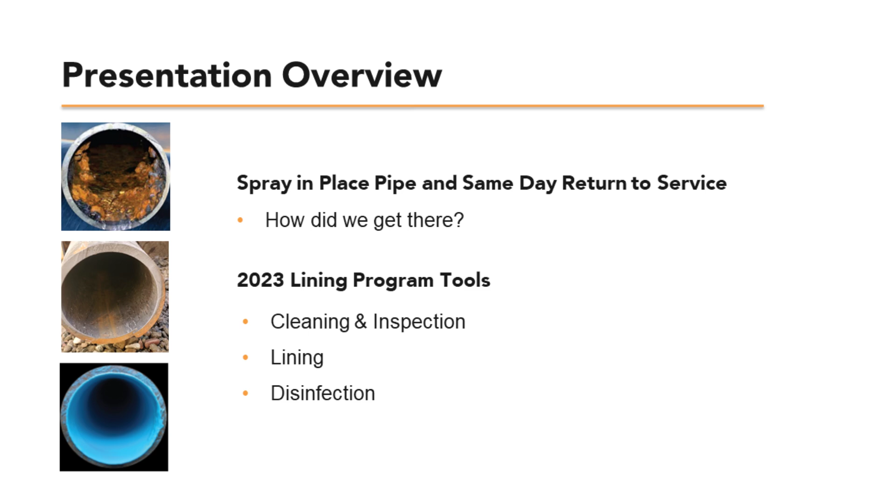I was asked to share a little bit about our journey implementing a spray-in-place pipe program, and we'll talk a bit more about what led us to choose spray-in-place pipe as an alternative for infrastructure rehabilitation, and share with you some of the tools we use in our cleaning, lining, and disinfection process that enabled us to provide same-day return to service.

This is probably a familiar story for a lot of water professionals, but as municipal and economic population growth rates have varied over history, so has construction of municipal infrastructure. In Sault Ste. Marie, a construction boom beginning with the end of World War II and lasting some 25 years accounts for the single biggest age cohort of water mains in the city. Predominantly made of cast iron, corrosion processes are the principal cause of deterioration of these pipes.

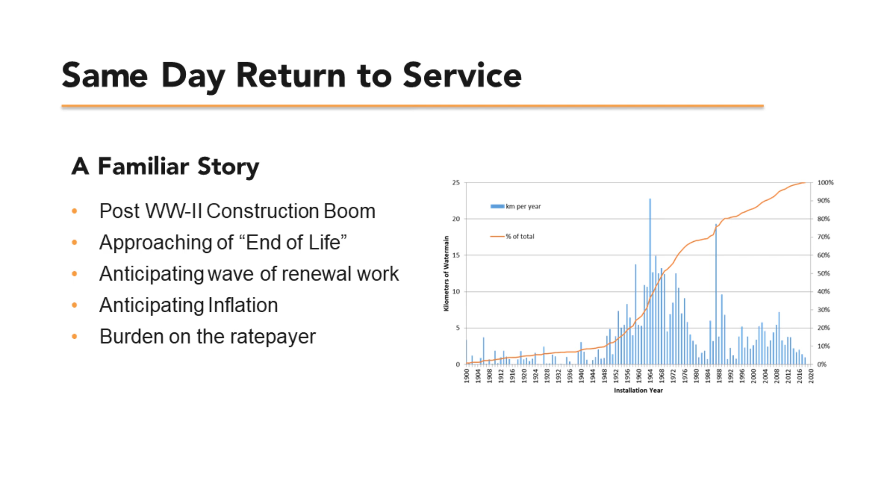The PUC reasonably anticipated a wave of infrastructure renewal at rates considerably higher than conventional replacement programs provided. Inflation of renewal costs was also anticipated. The PUC had a need to address this potential burden to its ratepayers.

Now, we're not alone. In 2018, the Utah State University report on water mains in the US and Canada described corrosion as a major cause of main breaks, described the average age of failure of water mains as being 50 years. The study also found that over 40% of water mains were of iron or asbestos cement, both of them subject to deterioration over time.

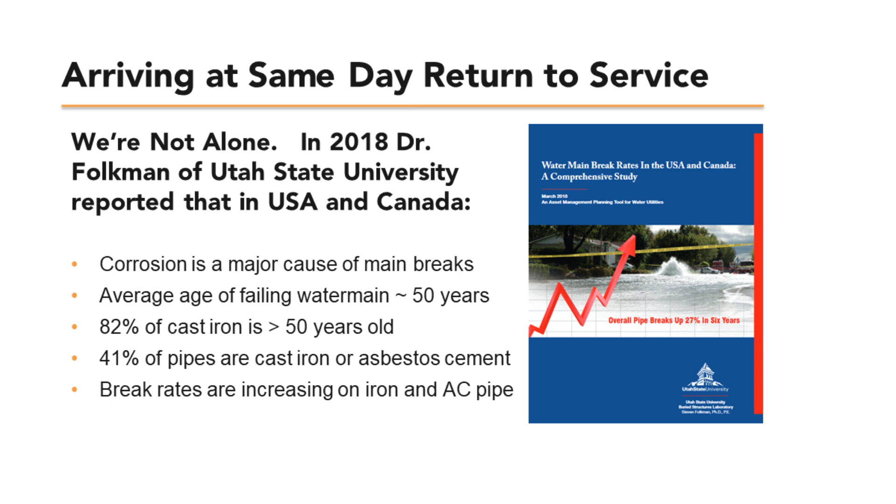So while a proven practice, replacement of water mains is costly. The past practice of replacing pipes would clearly place an unwelcome burden on our ratepayers. Under our strategy, water main is replaced only where required. Service life extension can be completed at a lower cost and address more pipe for the ratepayer's dollar. By extending the service life and deferring the cost of replacement, the burden to the ratepayer may be spread out over more years, normalizing the cost to the customer.

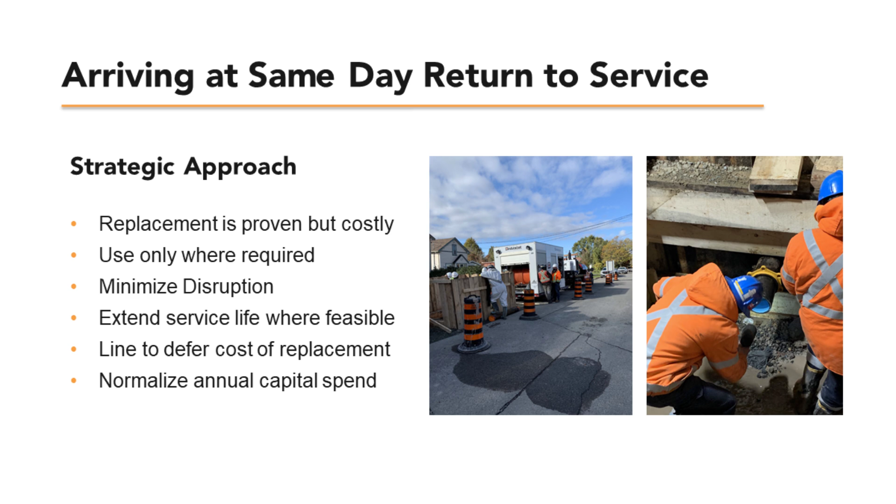A dig and replace or open cut water main replacement project, the length of a city block, can take months to complete, especially in built up areas. Unless combined with storm and sanitary replacements, dig and replace can be prohibitively expensive. Because storm and sanitary pipes may not require replacement at the same time as water main, other tools may be of better value.

Sault Ste. Marie also has a conventional pipelining program using cure-in-place pipe. Each lining section typically requires several weeks to complete, at a pace that eclipses trench excavation and pipe replacement. Conventional lining is often deemed a fully structural liner. Requiring several weeks from start to finish, temporary water systems are essential for conventional lining methods as well as full pipe replacement.

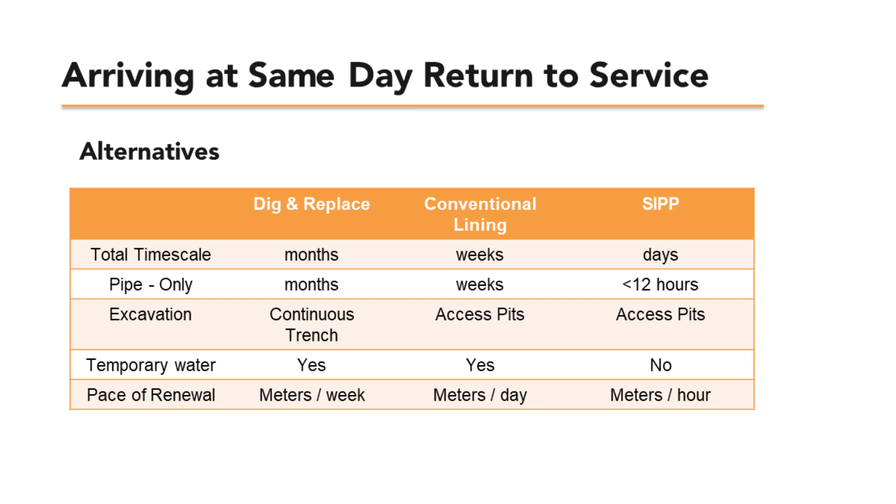Temporary water systems are a cost that does not provide value over the life of the renewed asset. The ability to forego a temporary water system would reduce the costs and accelerate the pace of renewal. Spray-in-place pipe offers the possibility of same-day return to service if timelines for cleaning, disinfection, and lining can be sufficiently compressed. With a same-day return to service, the cost of temporary water systems can be avoided, and that savings applied to increasing the amount of pipe renewed.

In 2020 and 2021, the Sault Ste. Marie PUC piloted watermain renewal by spray-in-place pipe, anticipating we could reduce neighborhood and traffic disturbance, progress faster than alternatives, realize savings from reduced labor, reduce or eliminate temporary water systems for added savings, increase productivity overall, and most importantly quickly intercept this wave of aging infrastructure.

PUC engaged a third party to evaluate this pilot program. Mark Knight, through the University of Waterloo, was involved with the evaluation of both years of that pilot program.

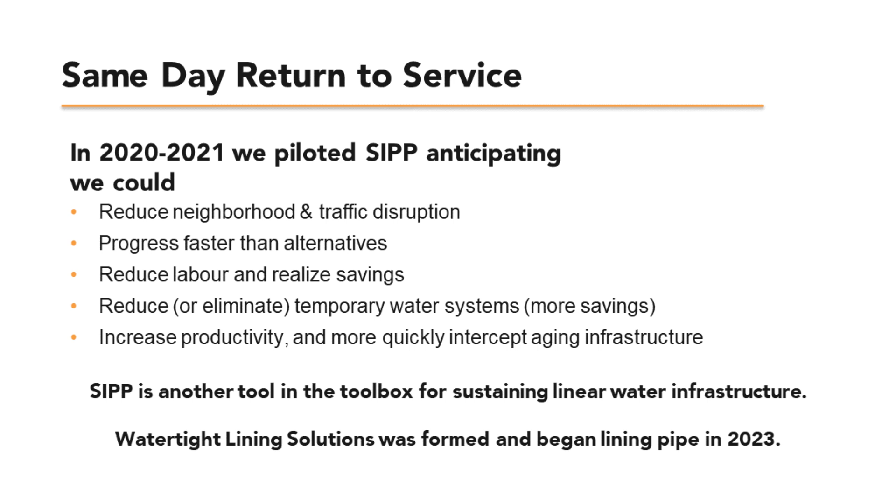A favorable conclusion led Sault Ste. Marie PUC to establish subsidiary Watertight Lining Solutions in late 2021. Over the course of 2022 and 2023, equipment was procured, a lining team was trained, and Watertight Lining Solutions completed its first season of pipelining.

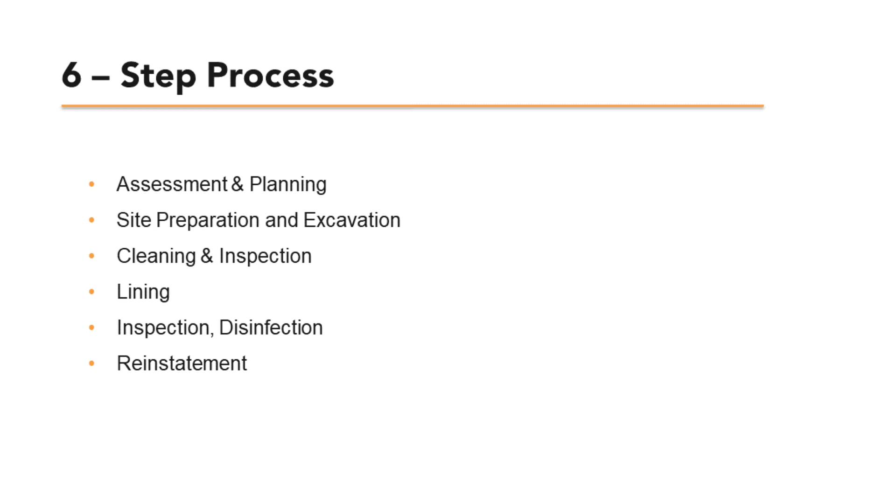So we'll look at some of the tools that we use in the lining program. Fundamental is this work structure we have, which we refer to as a 6-step process. It covers the lining program from inception, assessment and planning to completion and reinstatement of the pipe.

Prior to selecting a rehabilitation method or deciding to replace a water main, we need to clearly understand what we're trying to achieve. The objective of replacement and rehabilitation is to restore the required function of the pipe.

Loss of function may be in relation to reliability due to frequency or nature of breaks. It may be in relation to substandard fire flow as a result of tuberculation and lost capacity, or substandard water quality caused by buildup on interior surfaces of the water mains.

Due to the extensive water main infrastructure, a system owner may lack exact information on individual water mains. Most owners, though, have a considerable knowledge base that can help inform their design objectives.

This information might include pipe age and material, soil types, corrosivity, and various testing results such as hydrant and C factors. Operating records, such as break repairs and operator reports, are also valuable sources of information.

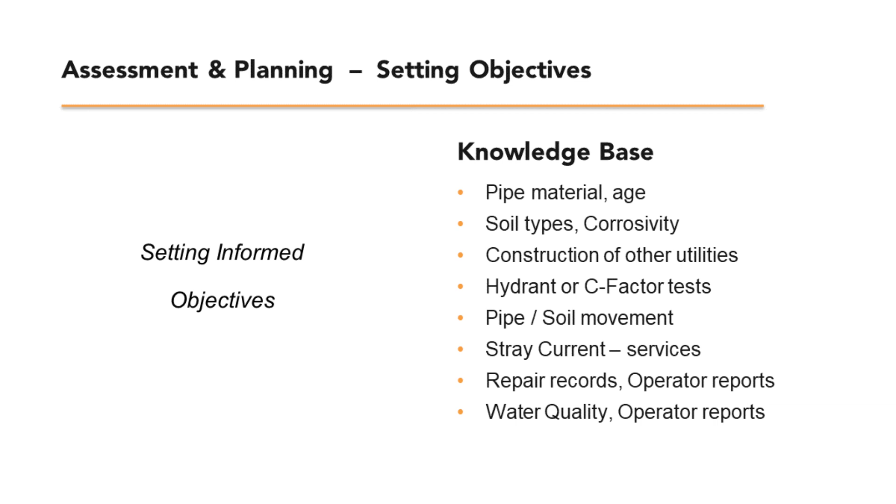Once design objectives are clear, we're best positioned to select the appropriate tool to restore the desired function.

Information requirements can differ for lining than for replacement projects. Lining equipment, for example, might not be able to negotiate bends in a water main. Plan and profile information is desirable to identify these areas, but with older pipes, profile drawings may not be available.

It's good practice to identify potential areas where deflections may have been used and investigate prior to construction. For example, installation of a sewer main may have required additional vertical bends in a water main to prevent the pipes from intersecting.

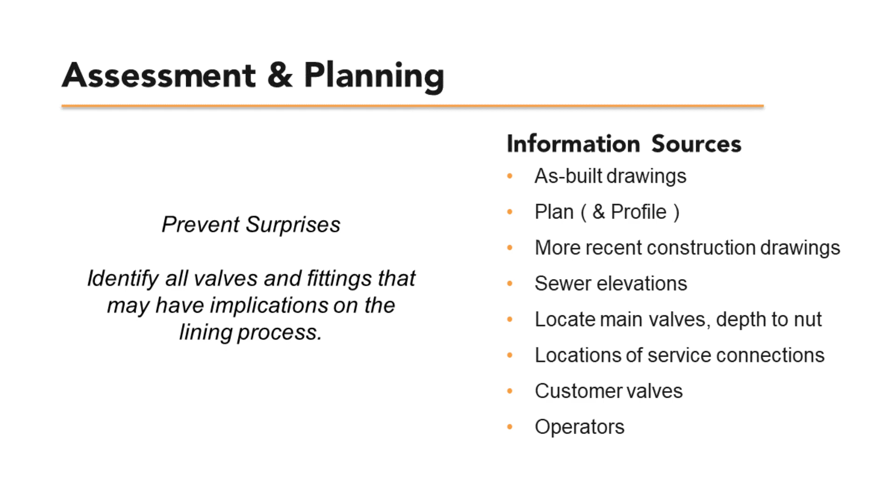Investigating sewer elevations from access holes and water main elevation from valve boxes can provide insight into areas where bends may have been installed.

Locates of other utilities can help determine where trench boxes can be safely installed and if any utilities may pass through the trench box. Advanced consideration of constructability of trench boxes can prevent delays and costs associated with poorly situated trench boxes, and help understand what's going to be in the way when working inside trench boxes.

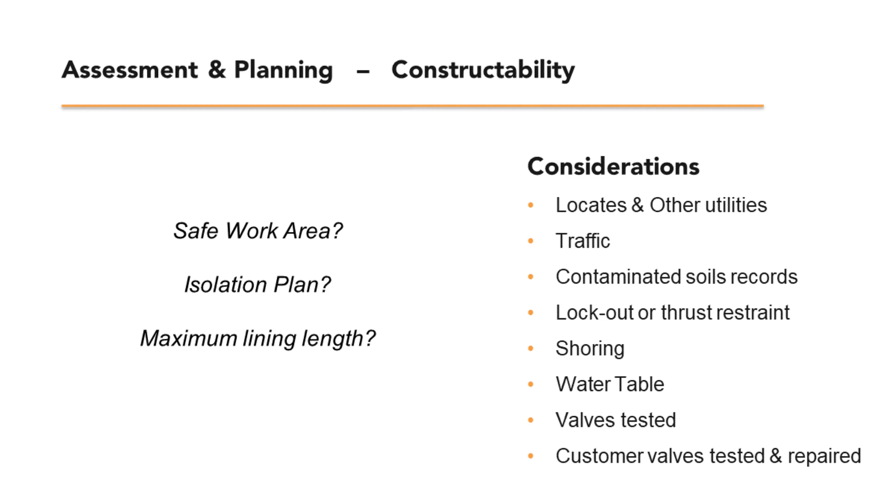Additionally, valves and customer shutoffs used to isolate the pipe being lined need to be verified in working order to ensure they will fully close during lining operations.

It's also important to give operational consideration to the pipes that are being lined. There needs to be a clear understanding of the extent and duration of the service interruption, implications on fire protection, any vulnerable persons connected to the system, and essential services. Some of these, depending on the role of the water main in the system, may require a temporary bypass.

Thorough construction drawings can help us address the unexpected. There are no street signs inside the pipe, so the more information that can be provided on drawings, the better.

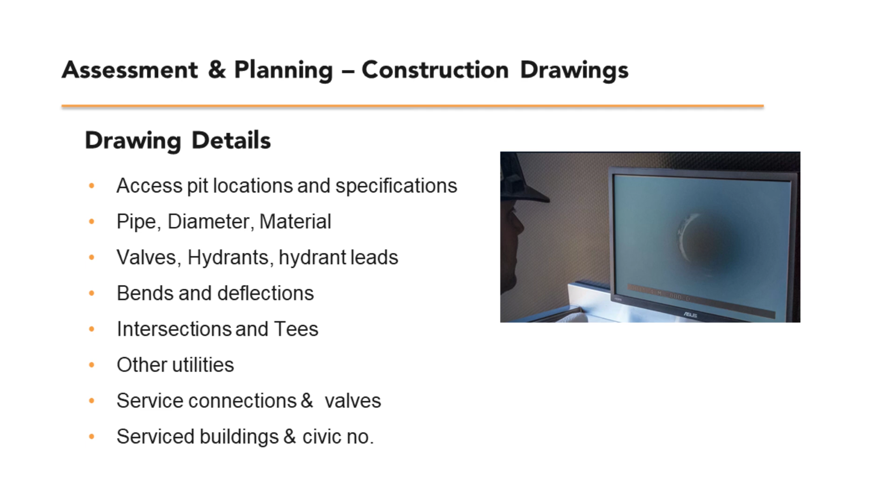During pipe inspection, when more services are found than are provided for on the drawings, accurate locations of services on the drawings will help distinguish which services should be abandoned and which should be reinstated.

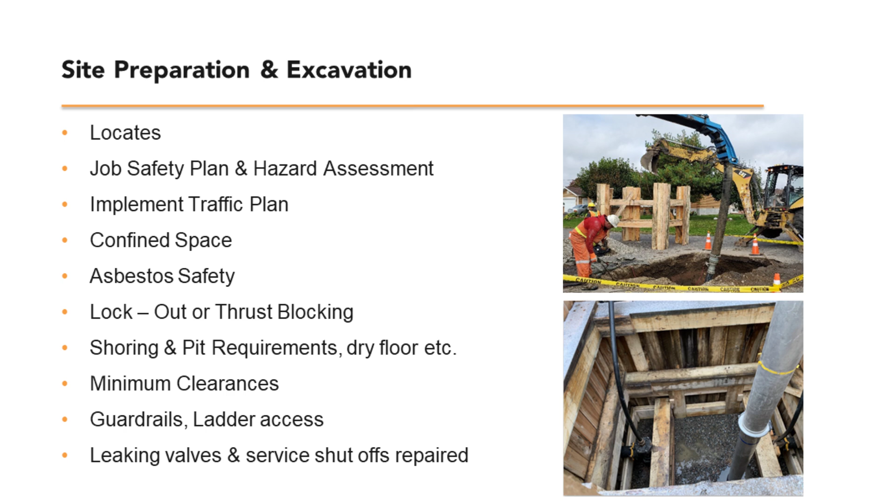These are some common steps that can be taken to prevent surprises that could delay the start of lining. Because trenchless solutions often leave roads open to traffic, good traffic management is also essential.

Now we'll take a closer look at some of our cleaning and lining tools.

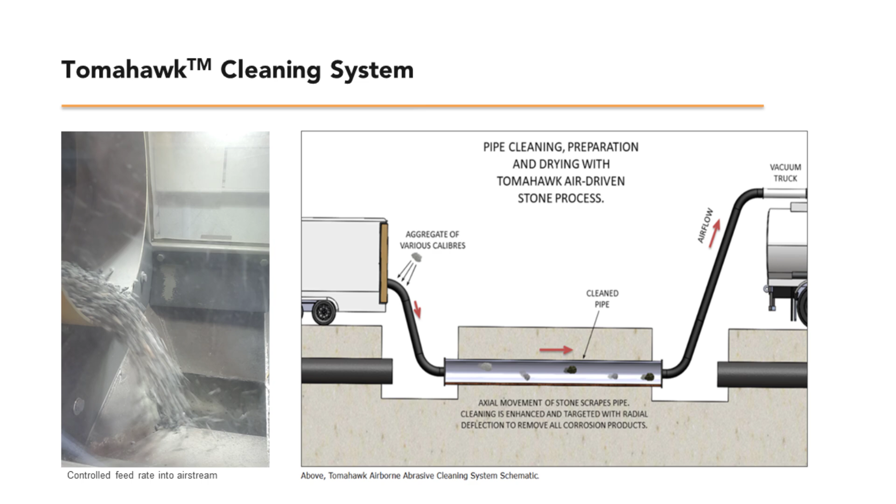The end result is a bare metal pipe wall, assuring a strong bond between the liner and the host pipe. Monitoring airflow and speed relative to benchmarks for a clean pipe helps determine when cleaning is complete. The process is suitable for cast and ductile pipe, steel pipe, and asbestos cement pipe.

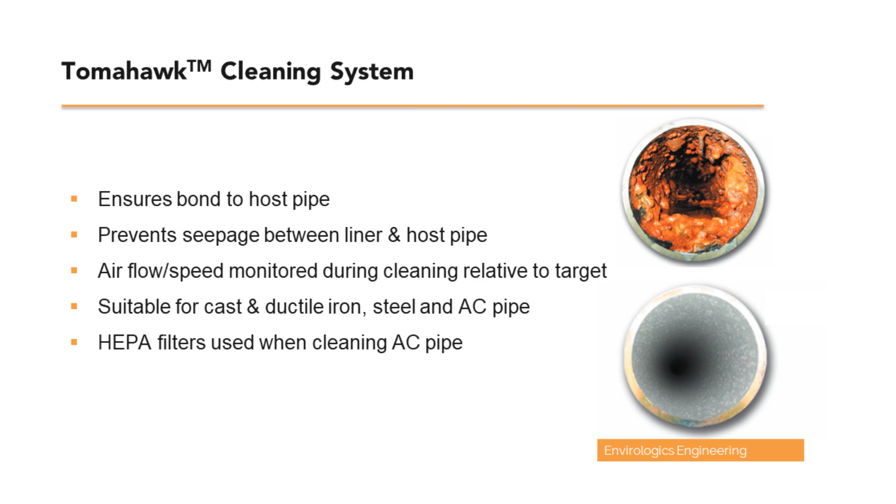When we cleaned asbestos cement pipe, we fitted the vacuum truck with HEPA filters and a water wash on the incoming airstream to safely contain any asbestos within the truck. There's a thorough procedure in the Tomahawk specifications and manual for addressing asbestos cement pipe.

Following cleaning, the Scout camera is deployed to record CCTV video inside the cleaned pipe. The Scout camera is propelled using airflow, again generated with a vac truck. The pipe wall is also dried with the process, as the pressure drop associated with air accelerating around the probe helps evaporate water from the pipe wall. The same process helps remove water from small services and joints.

An optional step available at this time is to deploy an evaluation tool to determine the remaining wall thickness in the iron host pipe. In the event the project objectives are not adequately informed, remaining wall thickness can guide on-site engineering decisions, including selection of a lining thickness, specific locations requiring repair, or identifying the need for cathodic protection.

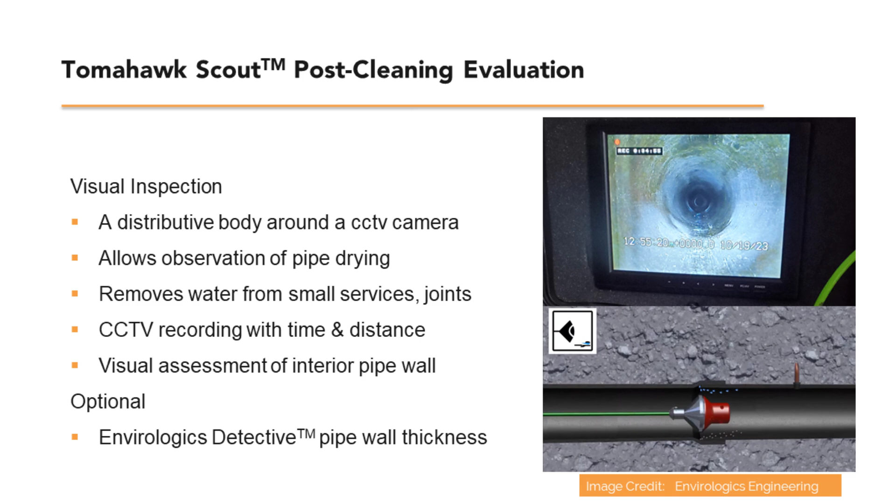We found 2 to 3 hours was generally sufficient to set up and complete Tomahawk cleaning on 6-inch diameter water mains about 130 meters in length. Material collected in the vacuum truck is a mix of tuberculation materials and stone, and is more easily disposed of than liquid waste associated with water jetting.

Now we'll take a look at the spray-in-place piping system.

The polymer system used for the pilot studies and subsequently adopted by Watertight lining is Resiline 320. The polyurea lining is certified to NSF 61 standards, a benchmark for acceptance for use in drinking water systems. This class of polymer has been used for decades in the UK. With a build rate of 3.5 millimeters per coat and up to a total thickness of 14 millimeters, this polymer can be used as a corrosion barrier to improve water quality or hydraulic performance, or to structurally enhance the pipe.

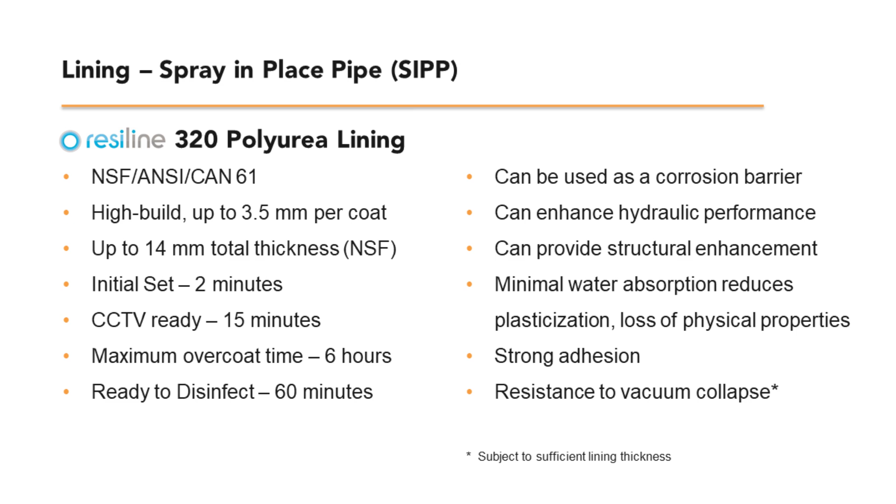The polymer has a rapid cure time, being dry to the touch within about 2 minutes. The surface is sufficiently hardened within 15 minutes to deploy a robotic camera for quality verification, and additional coats may be applied within an hour.

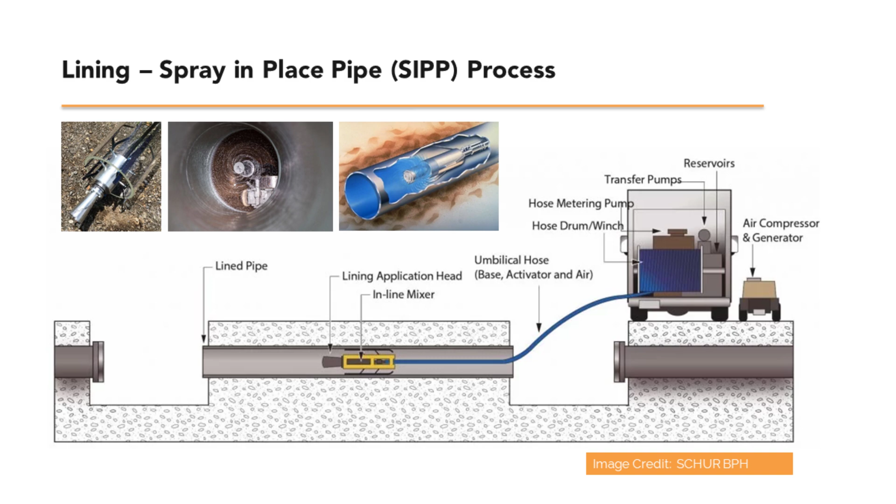The schematic below shows the lining head being towed from a launch pit at left to the retrieve pit at right, as the lining head, shown in the upper left, applies a coating to the pipe wall while it's being winched backwards towards the lining truck. Automated control over winch speed and flow rate provides a uniform thickness of coating within the pipe.

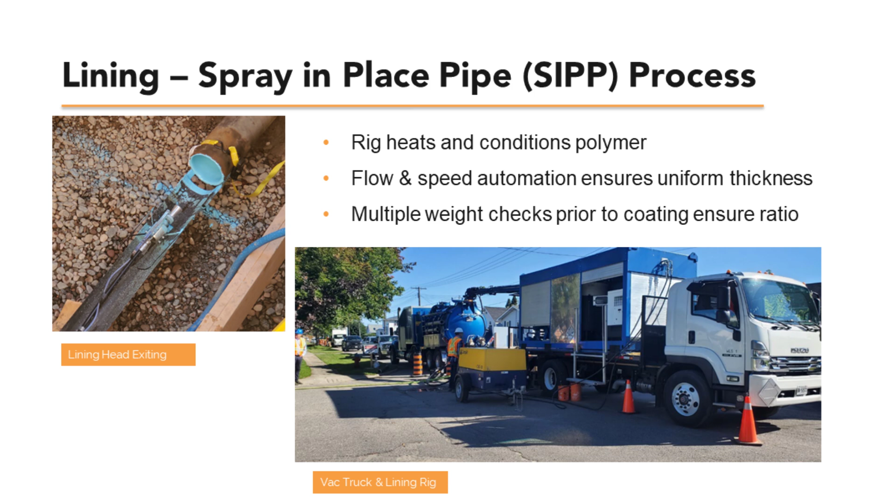The lining rig heats and shears the polymer to maintain optimal properties. Automation of feed rate and winch speed again ensures uniform thickness, and weight checks are done prior to coating to ensure proper mix ratios. Flow meters monitor mix ratio throughout the lining process, and the overall lining process is subject to an NSF approval.

We'll take a look at a pipe inspection. Following each lining, a robot camera is deployed in the pipe to document any defects and inform follow-up if required.

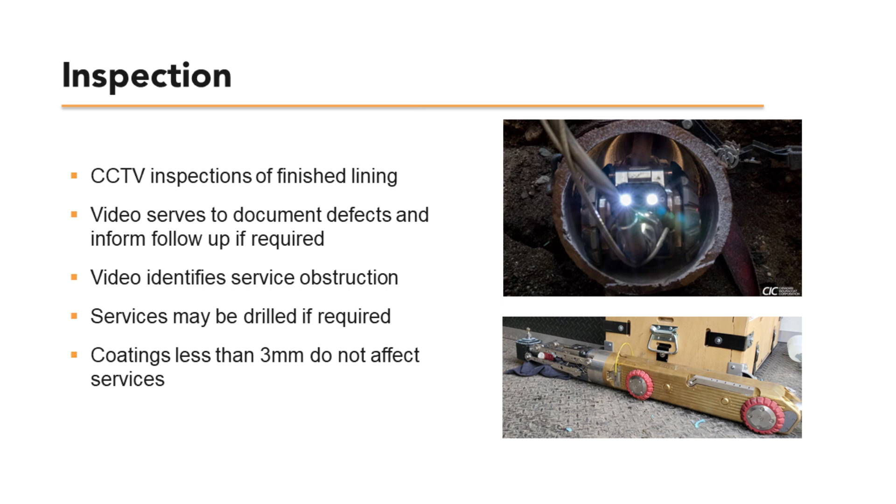Resiline has a design manual available to assist with classifying defects and guiding remedial action. In addition, corporation stops may be examined for obstruction. If blockage is excessive, the robot carries a drill which can be used to open up the service connections. Testing has shown that coatings of 3 millimeter thickness and less do not normally require drilling.

Cameras and cables are cleaned prior to use and wiped and sprayed with chlorine solution before entering the pipe.

We'll look at reinstatement. The province of Ontario has developed a procedural document that provides further guidance beyond AWWA C651 and has a section specific to lining water mains.

In Ontario, as a first step, it's important to always consult with a local medical officer of health prior to starting a lining project and make sure that the medical officer of health agrees with the reinstatement process. After lining, the water main can be flushed, disinfected, and microbiological samples collected. Subject to agreement with the medical officer of health, the pipe may then be filled and returned to service.

Alternatively, the medical officer of health may impose a boil water advisory if the pipe is reconnected. This represents an alternative to the cost of temporary water systems, which may still be desired at the discretion of the operating authority. It's a risk-based approach consistent with Ontario's approach for water main breaks.

Where conditions are controlled and contamination is not suspected, less stringent measures are applied to reinstate. If at any time contamination is suspected, then reinstatement procedures escalate. A reminder to ensure certified drinking water operators are present to make operating decisions such as this escalation when required.

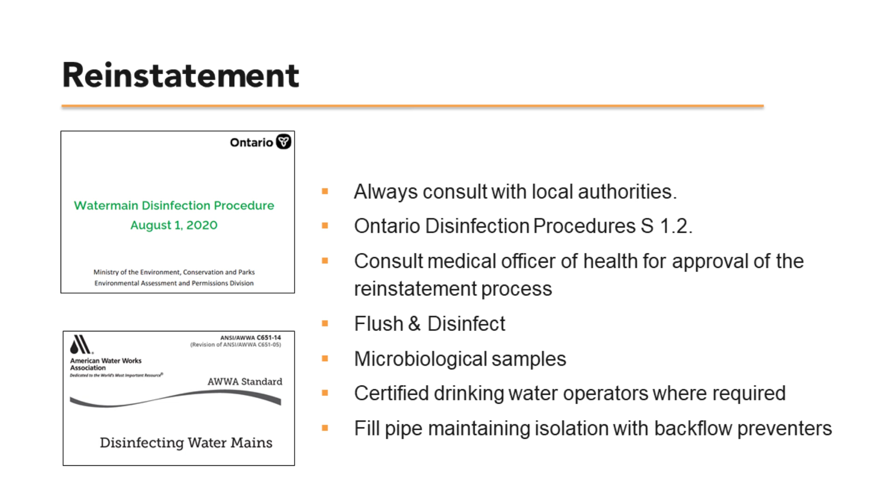Ontario's risk-based regulatory approach enables same-day return to service, faster and more efficient infrastructure renewal, and with less disruption to the public and less traffic risk.

The tool we use to disinfect the pipe, we tested a new device from the UK, a SteriCleanse from SCHUR BPH. The AWWA C651 spray method is also expanded on in Ontario's procedures for water main disinfection. The spray disinfection is advantageous because the quantity of chlorine used may be reduced, along with the risk to the environment in disposing of superchlorinated water.

The SteriCleanse system emulates a spray-in-place lining rig; only the inside of the pipe is coated to a prescribed thickness with chlorine solution. Because pump rates and winch speeds are automated, a uniform thickness of chlorine solution can be applied quickly and with consistency.

Chlorine concentrations may be recorded from day tanks before and after spraying the pipe to confirm concentrations meet standard requirements. Flow and speed may also be used to verify coating thickness. In addition, because higher concentrations of chlorine are used in the spray method, contact time may be reduced to as little as 30 minutes under the AWWA and Ministry of Environment of Ontario procedures, whereas normal disinfection times can be as much as 24 hours.

The use of the SteriCleanse system is one more step where we've been able to compress the time required to reinstate the water main. Various technologies have been combined to deliver spray-in-place lining and disinfection processes, achieving same-day return to service.